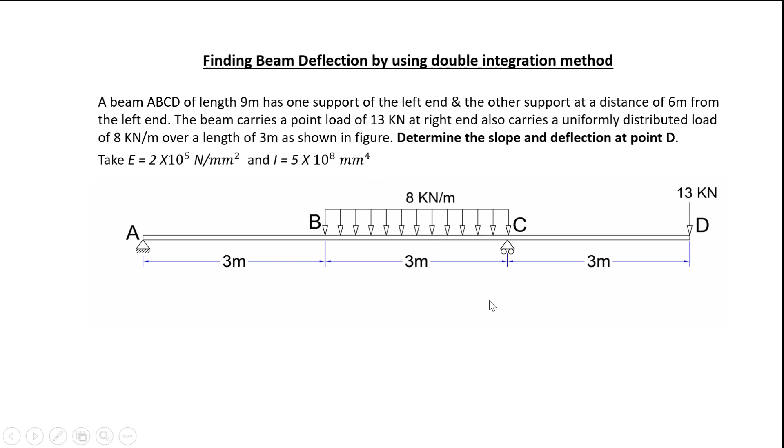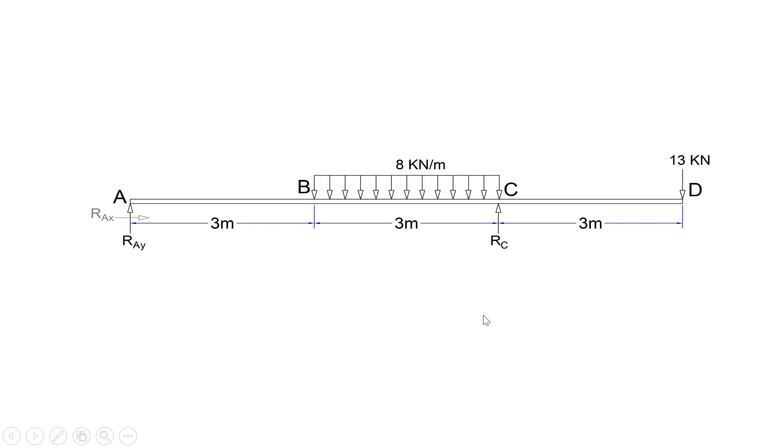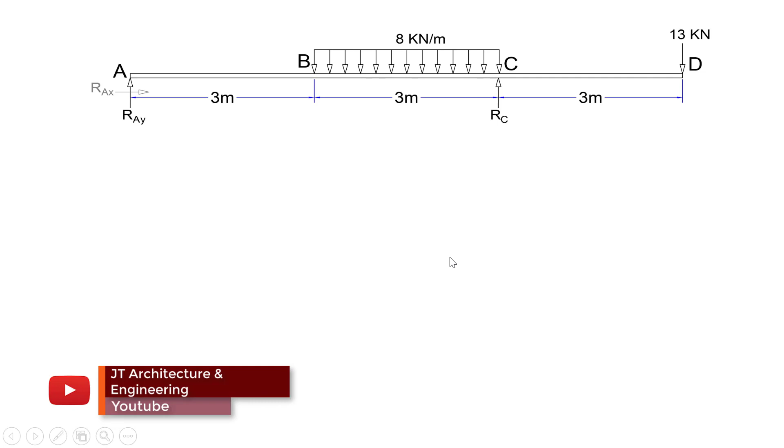First of all, we have to find out beam reaction at point A and at point C. Given load: point load 13 kN, UDL 8 kN per meter, and the value of modulus of elasticity has been given, and moment of inertia has been given also.

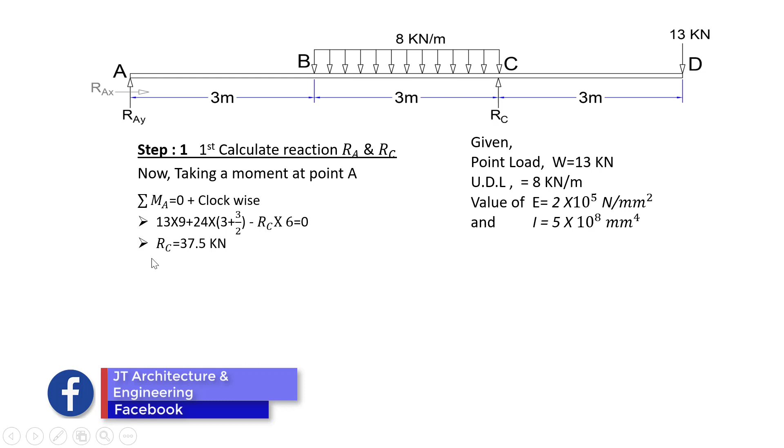It works positive, so it will be in the upward direction.

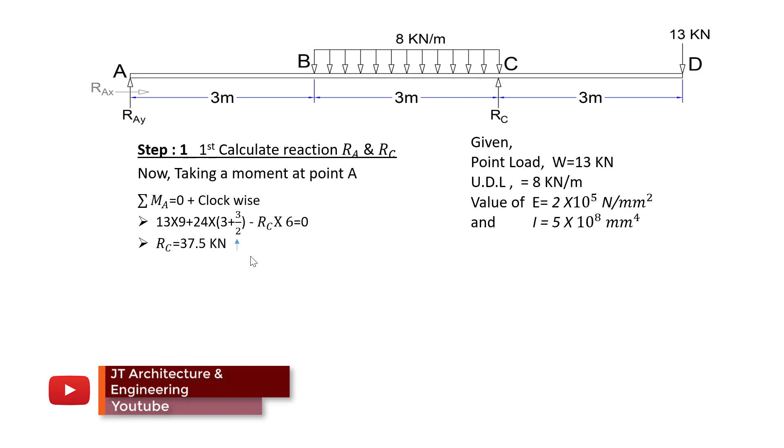Then we consider the vertical direction. So RA plus RC will be positive, and then the negative 8 × 3 UDL load, 24 kilonewton, and minus 13 kilonewton, which works downward so it will be negative. So RA equals -0.5 kilonewton.

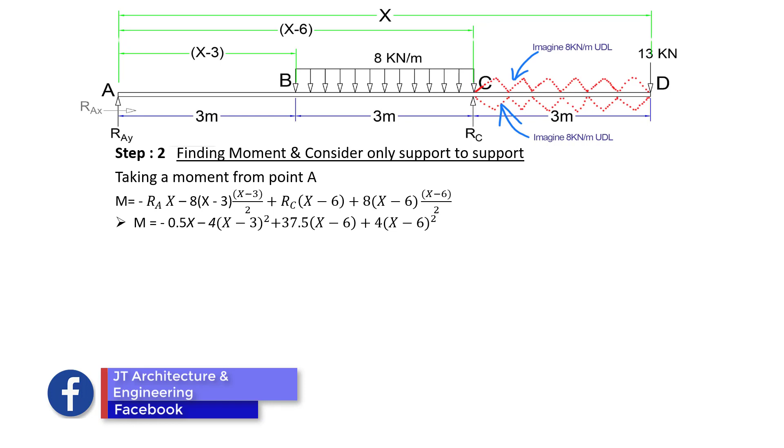We also imagine 8 kilonewton per meter as a UDL load, considered both upside and downside.

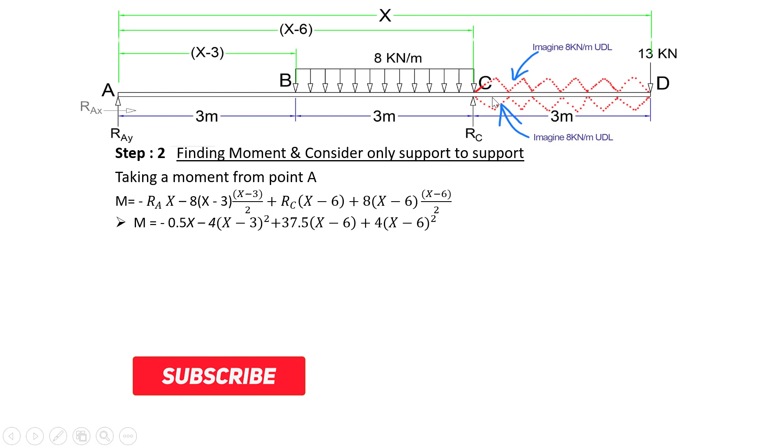So this also acts at the midpoint, working at the midpoint of this span: 8 into x minus 6. This 6 is from 3 meter and 3 meter, previous distance x minus 6 and x minus 6 divided by 2, since it works at the midpoint, that's why it's divided by 2.

So M equals: minus 0.5 into x minus 4, x minus 3 whole square, plus 37.5, x minus 6, plus 4, x minus 6 whole square.

Now using Macaulay's method, EI d²y/dx² equals M. This value will be counted.

Now we'll integrate into dx: integrating 0.5 x squared by 2, minus 4, x minus 3 whole cube by 3, 37.5 x minus 6 whole square by 2, 4 into x minus 6 whole cube by 3, plus C1. Here C1 is a constant. We'll consider this as one equation.

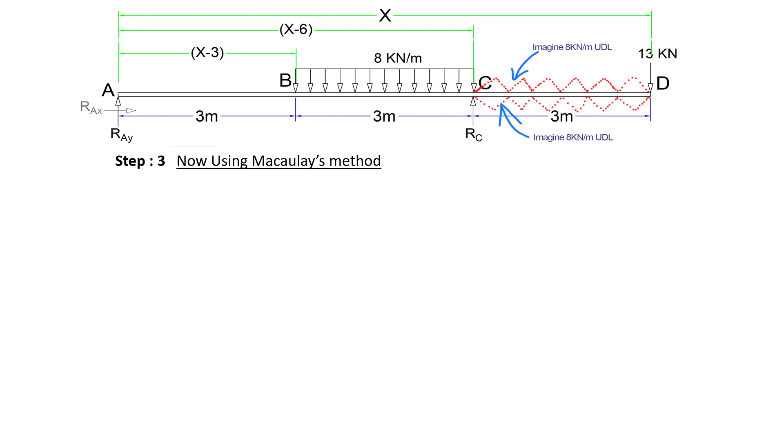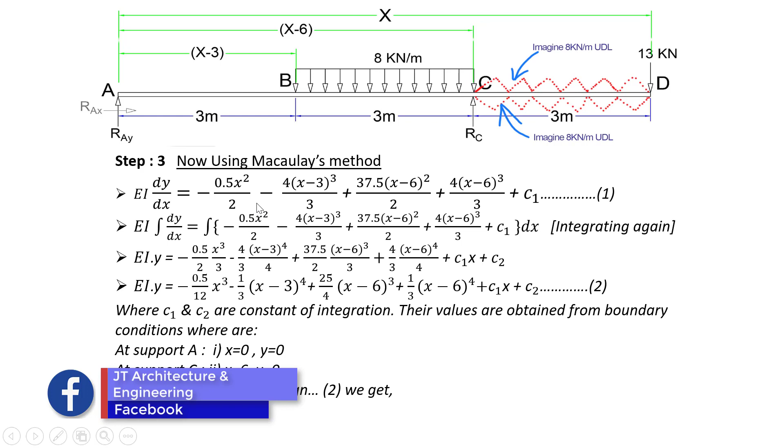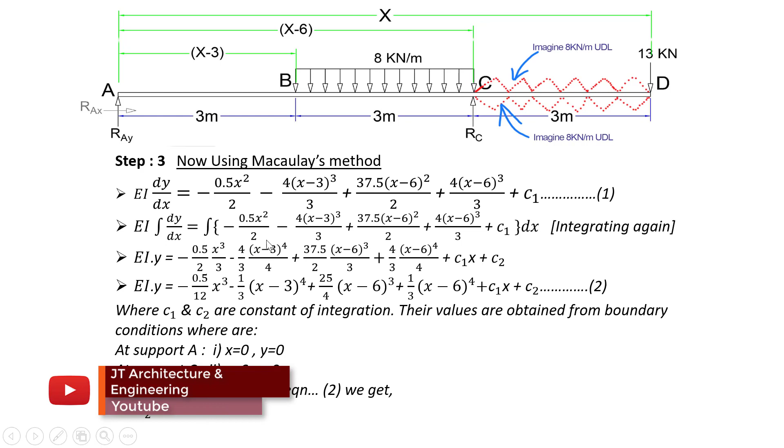Now integrating 0.5 is divided by x square, x to the power cube by 3, 4 into x minus 3 whole cube, it will be power 4, and this power 4 is also used at the down part.

37.5, x minus 6 whole square by 2. If we see 2 is power 2, also add 1, it will be changed to cube, and this cube is used at the down part 3. এখানে আমরা দেখতে পাচ্ছি যদি হোল স্কয়ার থাকে তাহলে সেটাকে কিউব করতে হবে এবং ওই কিউবটাই নিচে ব্যবহার করতে হবে।

4/3 এটা আমরা আলাদা করলাম, x - 6 cube, এটা 3 থেকে 4 হয়েছে পাওয়ার, এবং ওই পাওয়ারটাই নিচে থাকবে, প্লাস c1 কনস্ট্যান্ট, এবং এটার সাথে x যুক্ত হয়েছে, প্লাস অতিরিক্ত একটি c2 কনস্ট্যান্ট হিসেবে ব্যবহার হবে। আমরা এই ইকুয়েশনটাকে 2 নম্বর ইকুয়েশন হিসেবে কনসিডার করতে পারি, where c1 and c2 are constant of integration.

Their values are obtained from boundary conditions where at support A. At support A তে আমরা horizontal কোনো ভ্যালু নেই, that's why x equal to 0, এবং vertical distance নাই, so y equal to 0. At support C পয়েন্টে x equal to 6, মানে horizontal distance হচ্ছে 6 মিটার, এবং y এখানে কোনো distance নেই, তার মানে y equal to 0.

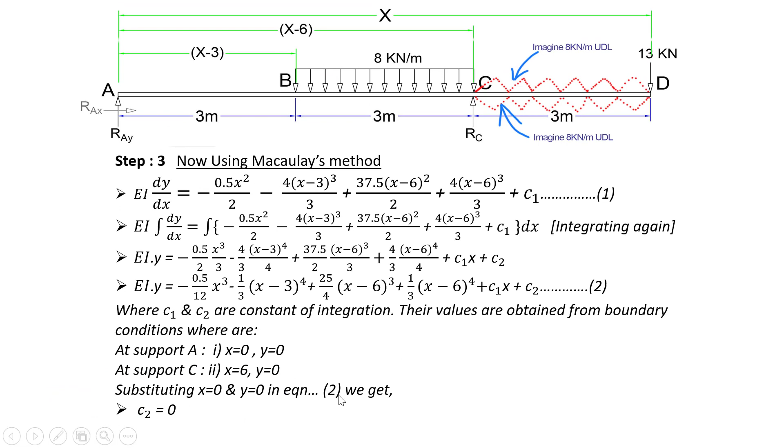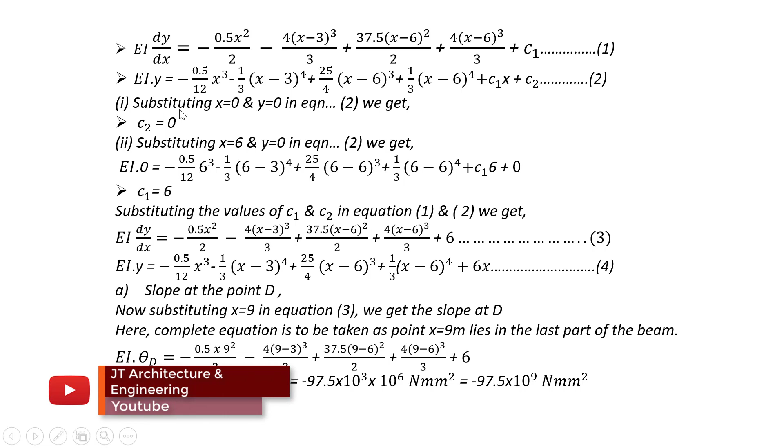আমরা ইকুয়েশন 2 তে ব্যবহার করব, substituting x equal to 0 and y equal to 0 in equation 2, we get c2 equal to 0. Also substituting x equal to 6 and y equal to 0 in equation 2, this equation we'll use, we get y.

y equal to 0, it will be 0 equal to -0.5/12, x equal to 6, by -1/3, x equal to 6 minus 3 power 4 into 25/4, x equal to 6, x means 6 minus 6 power 3 plus 1/3, 6 minus 6 power 4 plus c1, x means 6 plus 0. Here we can get c1 equal to 6.

Substituting the values of c1 and c2 in equation 1 and 2, we get -0.5 x square by 2. Only use c1 value 6, and it will be changed to equation number 3, and in equation 2 we also use this c1 value and c2 value, c1 equal to 6x and c2 equal to 0, that's why c2 will not be shown.

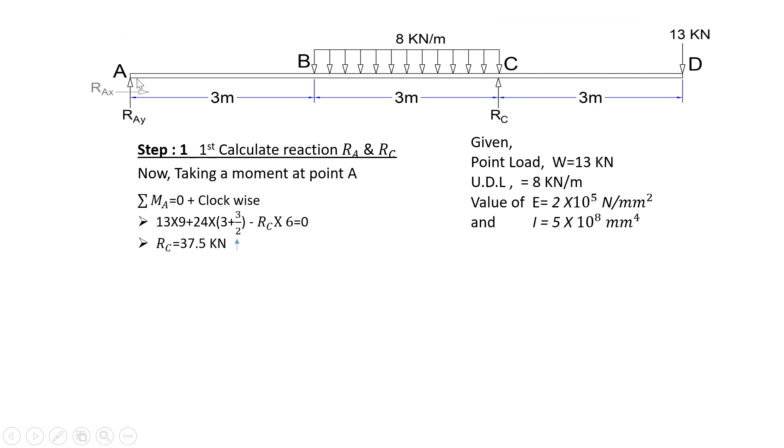Slope at last, at this point, we'll find out slope at point D. Now substituting x equal to 9 in equation 3, we get the slope at D. Here the complete equation is to be taken as point at point D. The distance is 9 meter, so x equal to 9.

So now substituting x equal to 9 in equation 3, we get the slope at D. Here the complete equation is to be taken as point x equal to 9 meter lies in the last part of the beam. So EI, equation 3, EI dy by dx will be considered theta D.

So minus 0.5 x square, x means 9 square, this into by 2, minus x means 9 by minus 3 by whole cube by 3, plus 37.5. 9 minus 6 whole square by 2, plus 4 into 9 minus 6, we will do plus 6.

So we can find we get minus 97.5 into 10 to the 9 Newton millimeter square. 97.5 kilonewton meter square, kilonewton means 10 to the power 3, and meter will be converted to 10 to the power 6 millimeter square. That's why this square will be added, we get 10 to the power 9 Newton millimeter square.

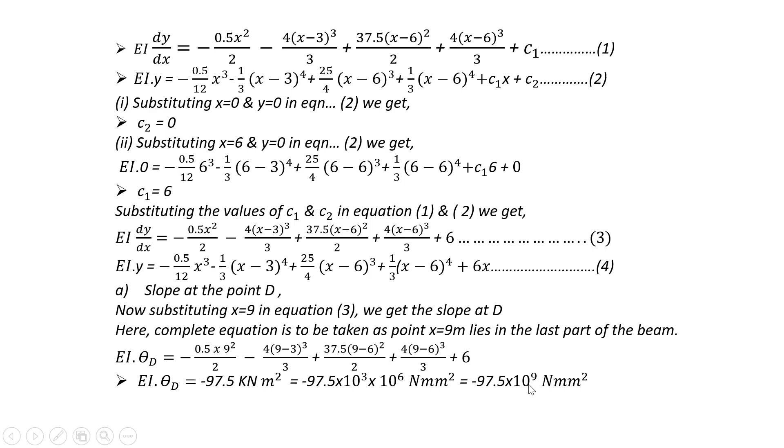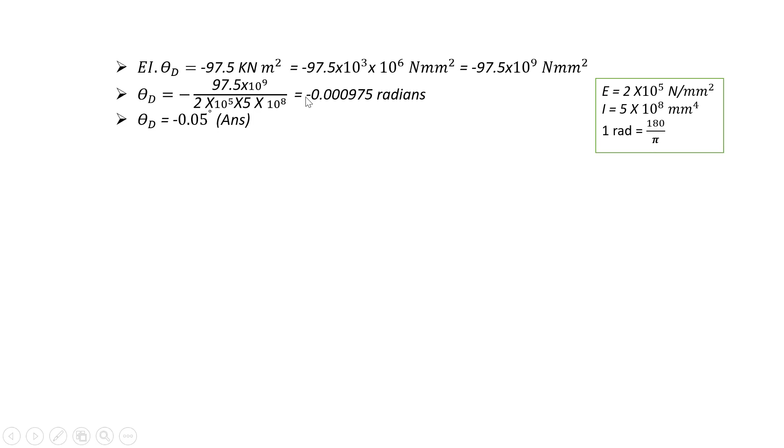Theta D, so we can find theta D equal to minus 0.05 degree. At above line, minus 0.000975 radians. One radian equal to 180 by pi. This is multiplication by 180 by pi, so we can get minus 0.05 degree answer.

Now at this moment we'll find out deflection at point D by substituting x equal to 9 in complete equation 4. We get the deflection at D. এখানে আমরা D বিন্দুতে deflection বের করব।

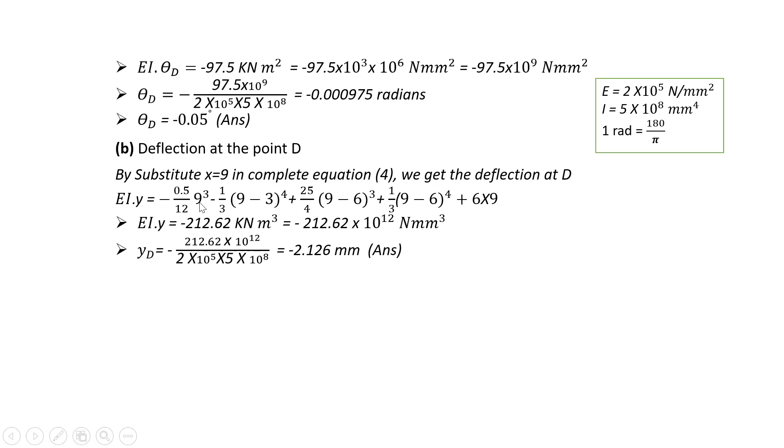minus 0.5 by 12, equation 4 এ আমরা x এর পরিবর্তে 9 বসাবো। এখানে we can replace the value of 9 of x minus 1 by 3.

X means 9 minus 3 to the power 4 plus 25 by 4. X means 9 minus 6 to the power whole cube plus 1 by 3. X means 9 minus 6 to the power 4 plus 6 into x means 9.

So we can get EI into y minus 212.62 kilonewton meter cube. We can convert this to 212.62 into 10 to the 12 Newton millimeter cube. So the deflection is divided by modulus of elasticity and moment of inertia, giving minus 2.126 millimeter. That's it.